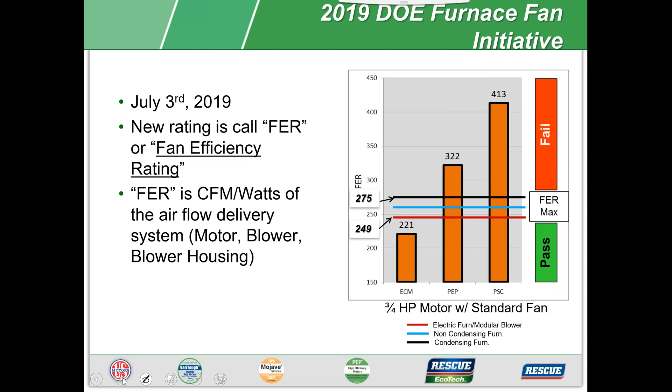Okay, so we want to talk about the benefits of ECM, because using an electronically commutated motor in a system, there are actually benefits. The first thing is energy efficiency.

So our ECM blower motor is 82% efficient. However, you can get the system efficiency up to 85 to 90% efficient, and that's because of the precise control you have over an ECM.

So when that system does not need to be on the highest speed the motor is capable of running at, it will run at the speed necessary. You're not wasting energy going full load, off, on, off. You can go at 65%, 75%, 73%, whatever that system needs to satisfy the call for heat or cool, and the motor can provide that without wasting energy. That's how your system can get all the way up to 85 to 90% efficient.

Also, the variable speed goes along with that precise control. Within an ECM, changing the speed is actually less costly and doesn't pose any longevity threats to the motor. If you use a motor with an external drive, like a VFD on a 3-phase motor, that's a more costly solution because that drive will cost as much as the motor. Whereas the ECM, with its integrated control, is a less costly and more efficient solution.

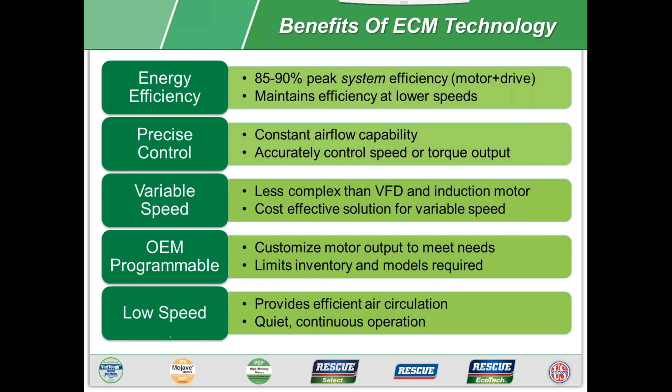So that's the overview, the benefits of ECM, but ECM stands for electronically commutated motors. Some other terms you may hear are brushless DC or BLDC, BL motors, or DC motors. But when you talk about an ECM, it's also referring to a BPM and a motor control. So the BPM is brushless permanent magnets, and that term is referring to the magnets that are on the rotor.

In case you're not fully aware of the different components of a motor, you have your rotor that has the shaft pressed into it. You have your stator that has your windings and your laminations - your stator for horsepower, poles, and the copper is for your poles for speed.

And the additional thing that's unique to an ECM is you have the control. This is the brains of that motor. Without that control being programmed, the motor will not operate. Compare that to the PSC - you energize it with your high voltage, 115, 230 volt, and usually that motor is going to run. Not true with an ECM. If it's not programmed, it's not going to run, even if you're energizing it with that line voltage.

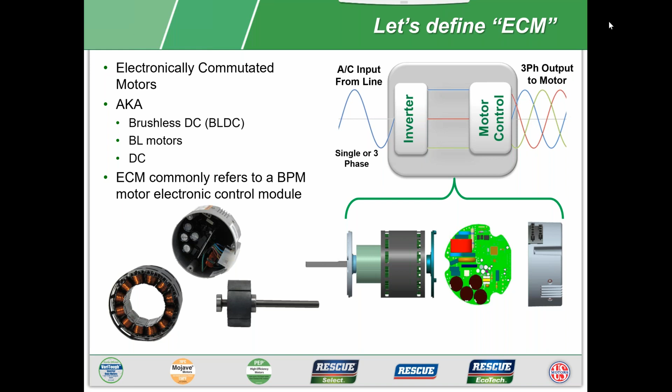So if you look at - okay, real quick on some qualities for the US motors. Our biggest failure for an ECM is surge and moisture, or elevated amps. So we have 6,000 volt surge protection, and you compare that to the OEMs - the older ones were 2,500. The other ones now are at 4,000, but again, we're at 6,000 volts, so we have superior voltage protection.

And the epoxy, that black material inside that control, is covering the components so moisture doesn't affect the motor. So we do have a superior ECM compared to other manufacturers out there. We have very little failures on our ECM - much less than on our PSC motors, and some may not believe that, but that is the case. And then on the motor side, we already talked about that - ball bearing and ferrite magnets.

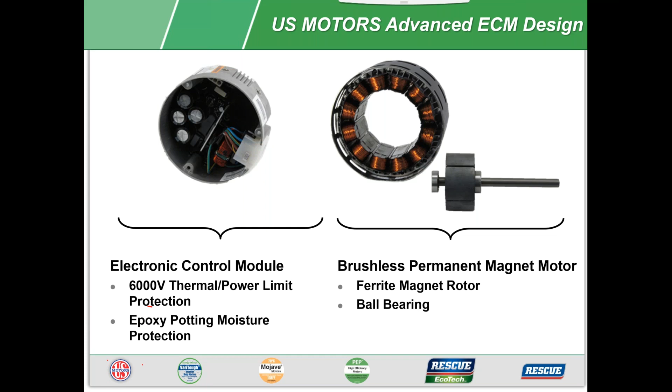Quickly, there's 3 modes of operation for an ECM: constant torque, constant CFM, and constant speed. This is important to understand because it's another benefit in the system over that PSC motor. So if you look here, on a constant torque motor, when you energize a speed tap, it's set for a specific torque point. The speed then equates to a speed in the system. As static pressure changes though, the motor will change its speed, but at the same time, it's maintaining torque.

Now compare that to that PSC motor - it changes its speed, but it loses torque. So the airflow on a PSC, as static pressure increases, drops off drastically. Whereas with a constant torque motor, maintaining torque, that airflow does not decrease. So as your filters get clogged, maybe a vent gets closed, that airflow is not going to reduce like it does on the PSC motor.

And constant CFM, that motor can change torque and speed at any combination it needs to, and by doing that, it's able to maintain airflow with no drop off. So again, much better than that PSC motor. And constant speed - that's set for constant speed, usually for something like an outdoor motor, like an outdoor condenser fan. It's just going to be at 1 speed. So we don't really talk about static pressure with a constant speed motor because it's a different application for those.

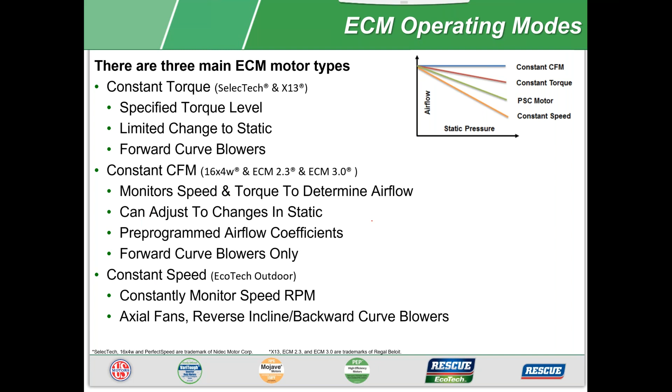Okay, very important. So when you're talking ECM, you need to identify it. When you guys are out there, you need to find how do I get the ECM I need to replace the one I just took out? It's very simple. You don't have to worry about constant torque, constant CFM, constant speed. That doesn't mean anything to you guys other than as far as your replacement. It tells you the benefit of it, but it really gets down to these connectors, okay?

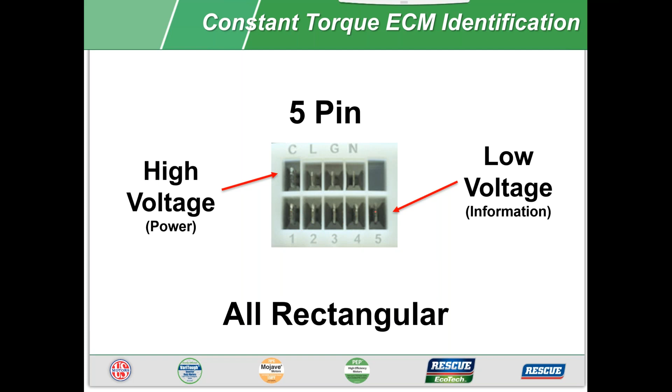So what we've started to do is really start to identify ECM by their speed taps, the number of speed taps they have on the low voltage side. So the first ECM you have is a 5-pin ECM: 1, 2, 3, 4, 5 pins. Next is 16 pins, so you have 16 small low voltage speed taps, and then 4 pin. So next time you come across an ECM you need a replacement, you need to identify, say, I need a 5-pin ECM, I need a 16-pin ECM, or I need a 4-pin ECM. And then be able to identify what your options are from there.

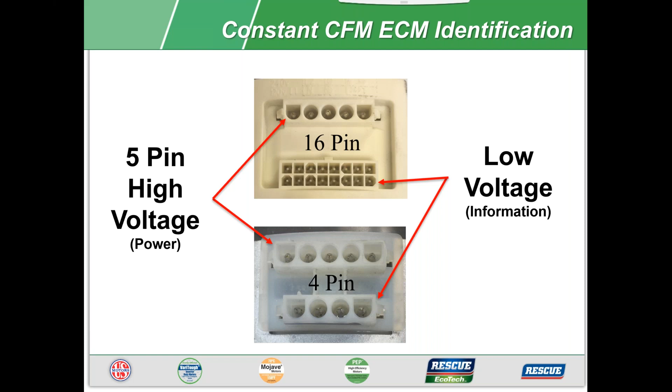And that's what we're going to go into now: what are your options for the different ECMs available to you today? In the aftermarket, the products you have available today is constant torque, that's the 5-pin. So you have the 5-pin ECM, that's the Rescue Select.

Then I'm going to skip one, because what you have today is a PSC to ECM upgrade. So you can take out a PSC, you've now seen the benefits of an ECM, you want to take advantage of those without putting in a whole new piece of equipment. You can pull out the PSC and put in an ECM, and that's our Rescue EcoTech, as well as you have a Rescue EcoTech Outdoor. So you can do the same thing, take your PSC condenser fan motor out and put in an ECM to get that efficiency gain there. And the one I skipped is the 16-pin. 16-pin will be out in a few months.

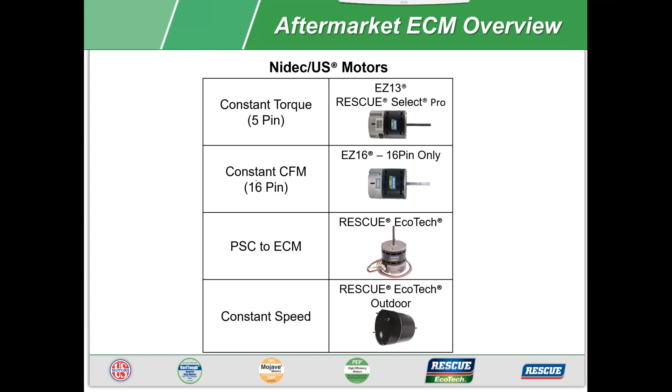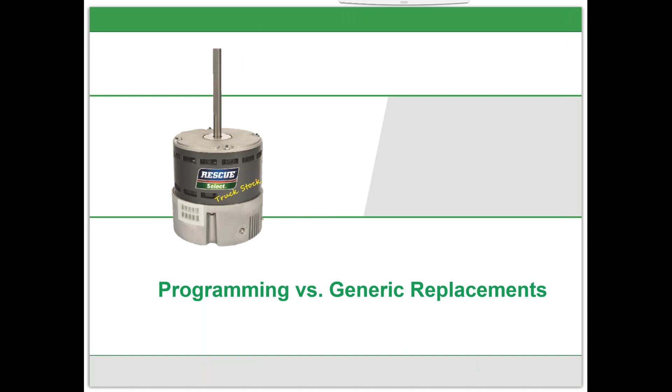Okay, so the first one, where are we at? The first product we have is that Rescue Select, and it's that 5-pin ECM replacement. So it doesn't matter what brand of equipment you are working on. If it's a 5-pin ECM, you have that available to you, and you could get that from Control Central on the e-commerce, and that motor will replace any brand out there.

There are generic profiles on that motor, so it is pre-programmed for you. Now one thing to note, when you just take it out of the box and use it at the generic setup, you won't be matching exactly the OEM. So the best thing to do is to have the motor programmed. You can program the motor yourself using an app.

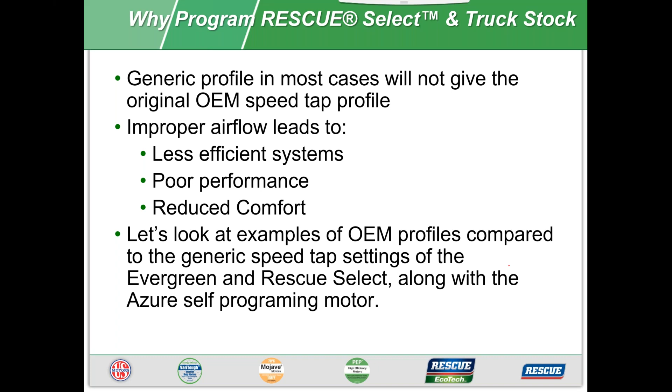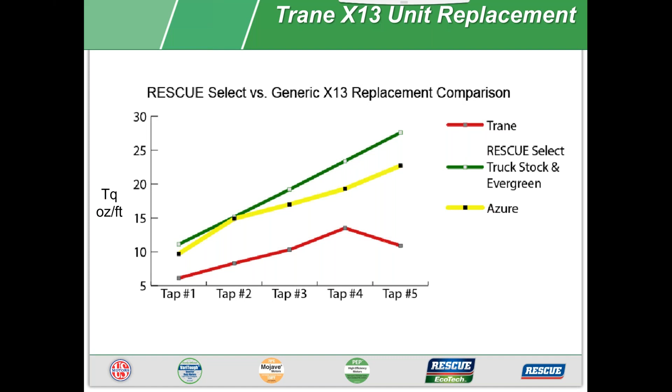Okay, so I just want to show you some examples. So out of the box is the green line you see here, and those are a couple different. Ours out of the box, there's an Evergreen motor out there, and there's an Azure motor, that's the yellow line. But as you can see, the profile from the OEM is much lower than what's out of the box there. So it will work, the generic will work, you'll be pushing a little bit more air than you were before, which will make the system a little bit less efficient. But again, programming it back to the OEM specs is available with the Rescue Select product.

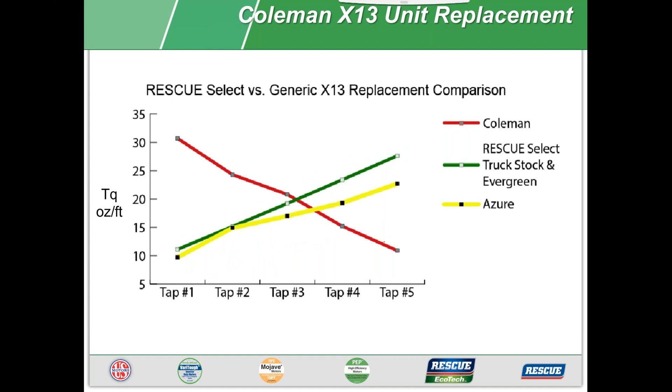So again, Rescue Select 5-pin ECM is available to you today. Does not matter what make or model you're working on, if it's a 5-pin ECM you have that solution available to you today. And the good news is it's a half to a third of the cost of going back to the OEM. We offer a 2-year warranty on that motor. And if you program it, you'll get the right airflow, you won't have those wrong airflow issues of too much air or not enough air. So Rescue Select 5-pin is available to you today.

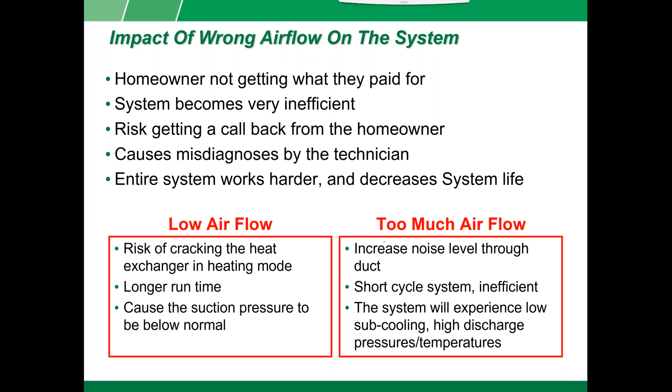Our next product is the Rescue Ecotech. So the Rescue Ecotech is that drop-in replacement for a PSC. It's 82% efficient at high speed at full load, versus that 60 to 65% efficient for that standard PSC motor. Now what makes our product unique from any other PSC replacement is our patented control allows you to wire that motor exactly the same way as that PSC was wired. There's also 5 speeds, and it's a constant torque motor. So based on static pressure changes, or if you have a higher static pressure, you're going to be able to maintain that airflow much better than that PSC motor you'd be taking out. Important, this is not the OEM. So Rescue Select is if it's an OEM 5-pin, Ecotech is a PSC, you're putting in an ECM.

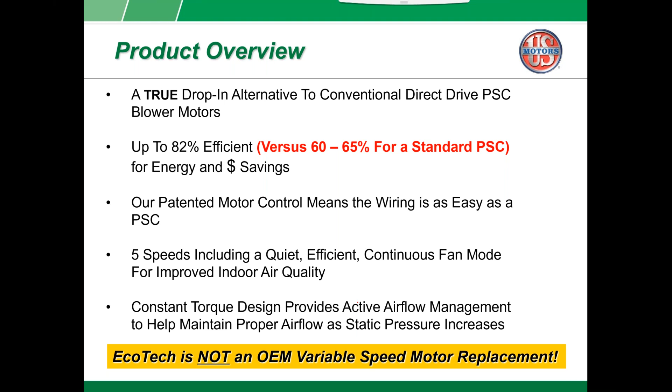Okay, also 2-year warranty. The motor is reversible, it's dual voltage, and all ECM motors are ball bearing.

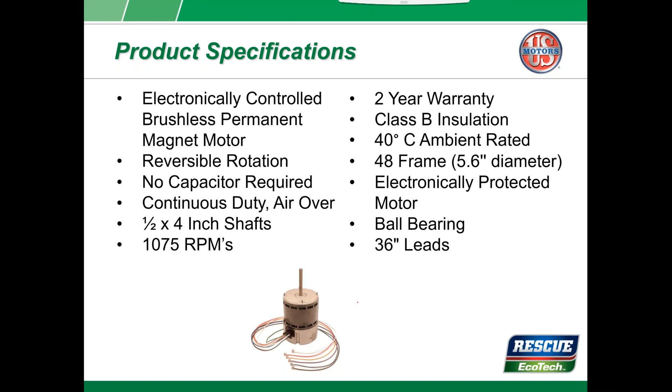Hey, real quick, I'll add to this. One of the nice features about Ecotech, we make 4 models of this motor. It gives you from 1 horse down to a 5th horse. Probably our most popular is the 5532, which covers from a 1/2 horse down to a 1/4.

And you can see how simple it is. Your wiring harness has 5 wires coming off of it. In the 1/2 horse 5532 case, the black lead goes to cool, the yellow lead goes to heat. You park the other 2, and the red is constant fan.

Constant fan is always red. If you don't have a constant fan tab on your board, we provide a splitter that pulls power off the door switch on the furnace, which gives you the red lead for that hot.

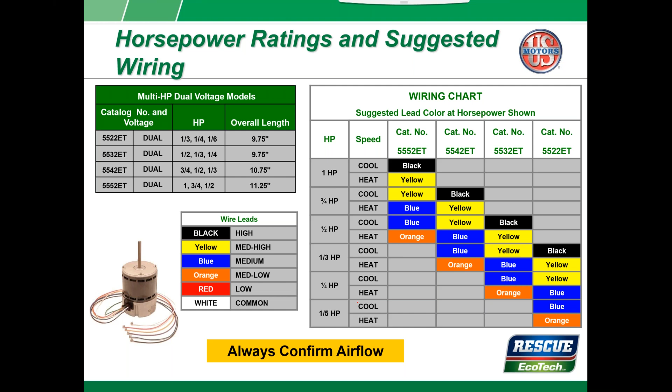We've got contractors here in Chicago where this is the only motor, and Dennis has them also in St. Louis. They carry two Ecotechs, a 5542 and a 5532, on the truck, and they do not do any PSC replacement. They just use the Ecotech motor for every replacement they do. So it's a great truck stock product for contractors.

There's also rebates available. If you take out a PSC motor and put in an ECM, there's many utilities across the country offering rebates. Out of St. Louis, we have Ameren offering a rebate. ComEd here in this area offers, they just renewed a new rebate for replacing a PSC motor with an ECM product, and it's $100 for a motor.

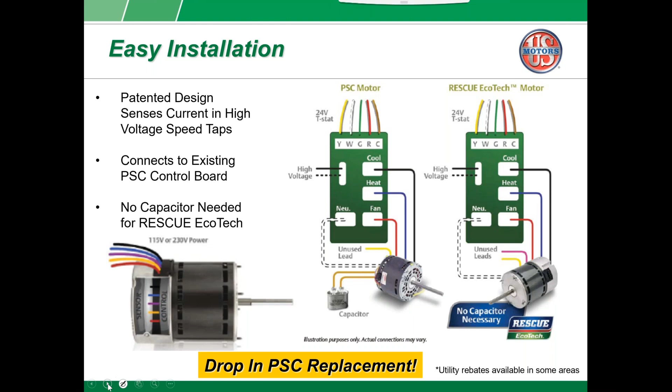Okay, and then finally we have the Rescue Ecotech Outdoor. This is a high efficient ECM condenser fan, that constant speed ECM. So you can pull out your PSC blower motor, your indoor motor, and take out your PSC outdoor motor and install the Ecotech Outdoor for that. That covers a fifth through a third, and it's only in 208, 230 volt for that outdoor condenser fan.

What's nice about this, especially thinking truck stock, is this motor can be set up to operate at 825, which is an 8-pole motor, and 1075, which is a 6-pole motor. Compare that to that PSC, you'd have to carry one motor to do 825 and another motor to operate at 1075. You still have all the quality features, that 6,000 volt surge protection, and obviously we have beefed up moisture protection because it's an outdoor motor on the Ecotech Outdoor.